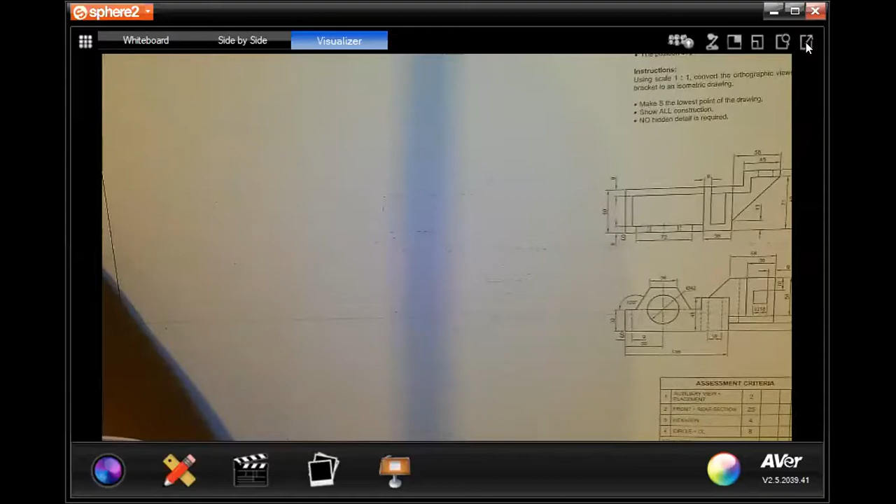So this is the task that we have today. Like I said, it's from March of 2017. It was a supplementary exam. So we want to answer it together and see how best we can negotiate our way to the required answer. The question reads, question number 3, isometric drawing. Given the front view and the top view of a bracket, so we have got the front view and the top view. Remember, in paper 2, we make use of third angle orthographic projection.

The position of point S on the drawing paper: point S is regarded as the lowest point in terms of an isometric drawing, or the closest point to you as an observer. Using a scale 1:1, convert the orthographic views of the bracket to an isometric drawing. So we need to convert these 2-dimensional views to a 3D pictorial drawing. Make S the lowest point of the drawing, the point closest to you. Show all constructions, no hidden detail is required.

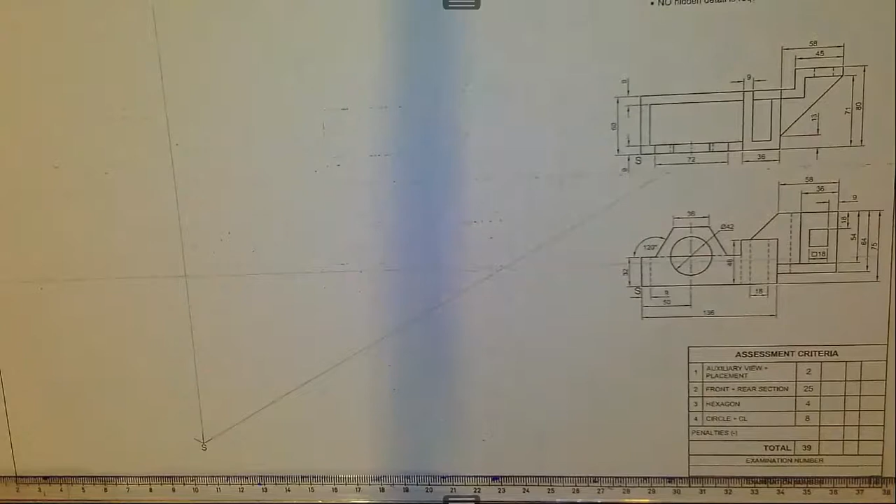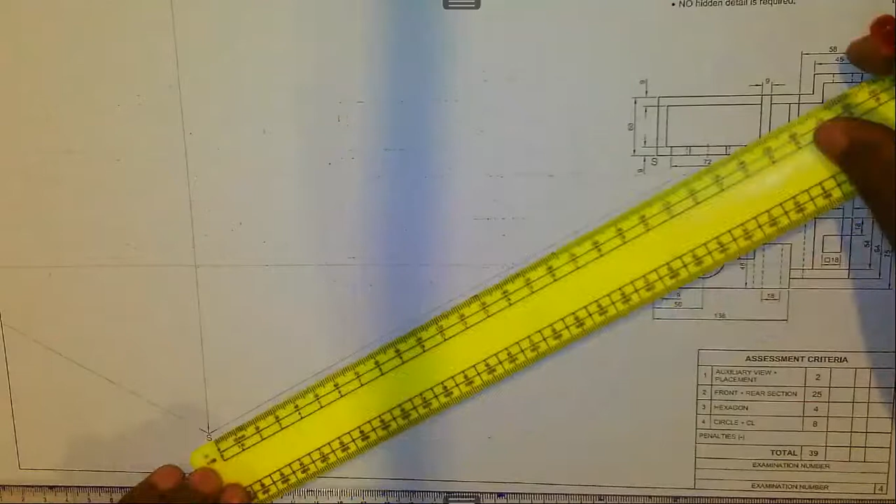The first thing is the establishment of the isometric box. Draw a faint line to the right, another faint line going up, then this one going to the left. We need those measurements. From this point to that point, that's 136, and from the other end at the top view, we have got 58. So 136 plus 58 gives 194. Remember, the isometric box is about defining the overall space that you will need. So we have got 194 there.

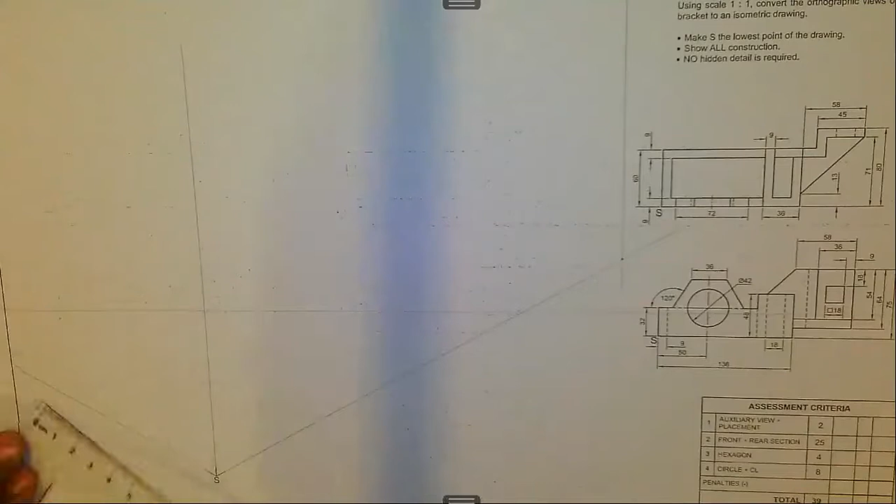We draw a faint vertical line from here, like that. Next, we need the overall width from the top view, which is 80 millimeters. So we measure 80 and take this one up faintly. The last thing we require for the isometric box is the height. The overall height from the bottom to the top is 75, so we measure 75 from here, and go to that slightly.

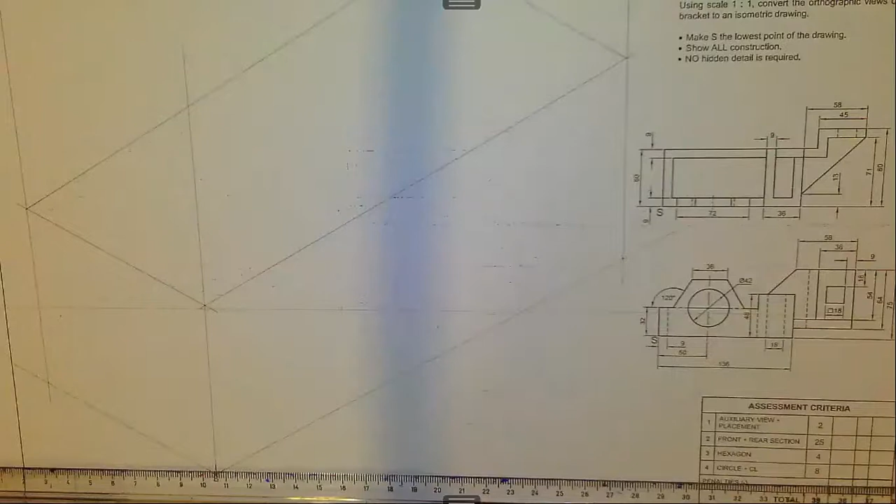Right, okay. So that's what we have in terms of our isometric box. We shall bring this one down slightly once we have defined that detail. Then the next thing that we want to look at, now you start with the definite, easy details that you can easily define. We have got the distance from here to there, which is 32, right? So we measure.

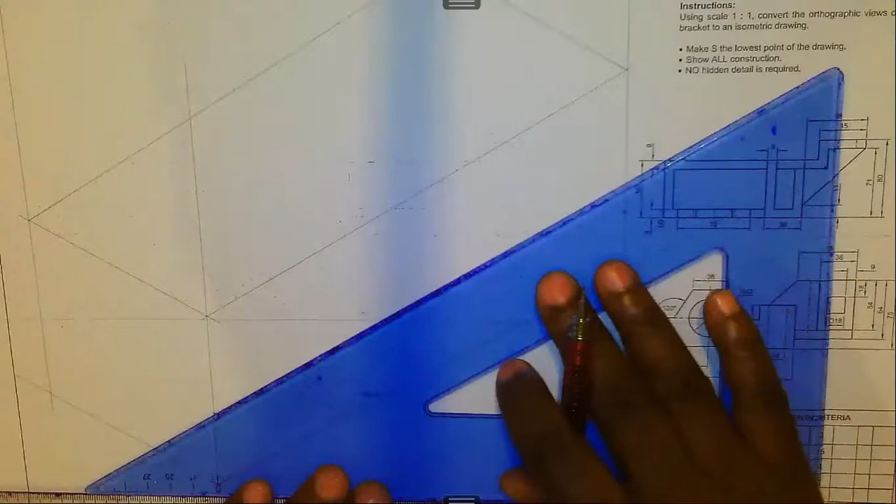Right, we have got that. Then we also take it to the left, like that. But once you have done that, the first part that we require is not going all the way 80 millimeters. We just need one which is 60 millimeters. So we are going to do this. Measure from here to there.

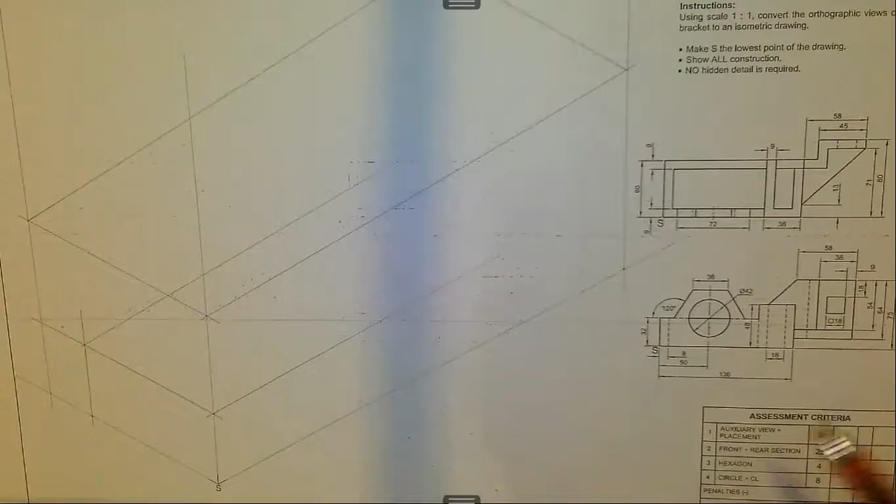Like that. Then we take this one like this, right? We are not going to draw all the way, because the detail may not go all the way as well. Right, okay. Now, the next thing that we want, there is this part, which is sort of a hexagonal part. We are not given the height from here to there, right?

So what we need to do is to create an auxiliary view. So we can come here like that. And we take this one up. Right, the side of that hexagon is 36. So we can measure 36. Right, like that. Take your compass.

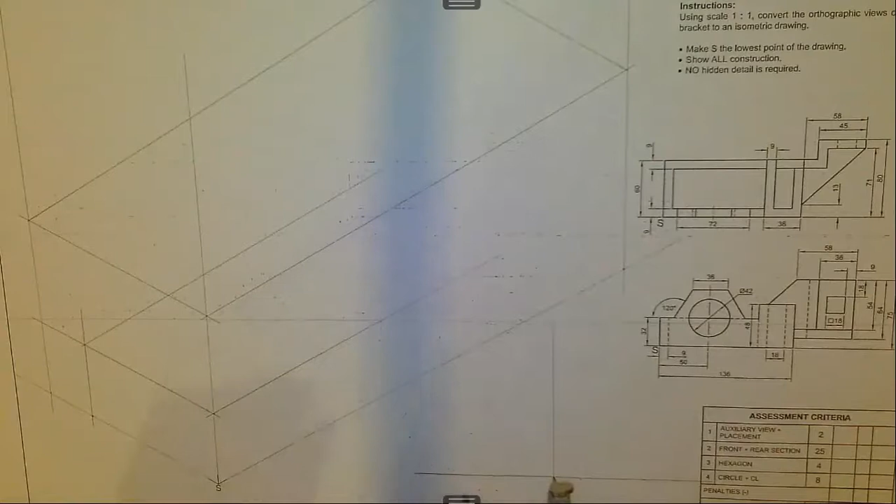Right, if you check with regards to the information that is provided, the distance from here to there, which is the same as from here to there, is equal to 72. So 36 times 2 would give you 72. Then you mark this side, and you also mark that side. Remember, you can do this using a set square. Let me just illustrate that. Right, from here to there, you have got that. I would make this one slightly dark so that it will show our auxiliary view properly.

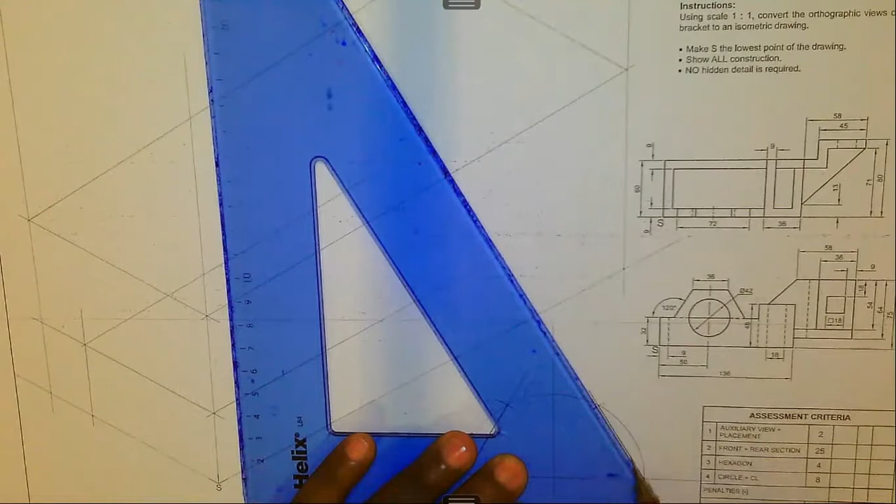Right. So we do have our auxiliary view. So this point is that point. So what we need to find is what is the distance from here to there. We realize it's 50 millimeters. So we can also come here and measure 50, and draw a faint line like that.

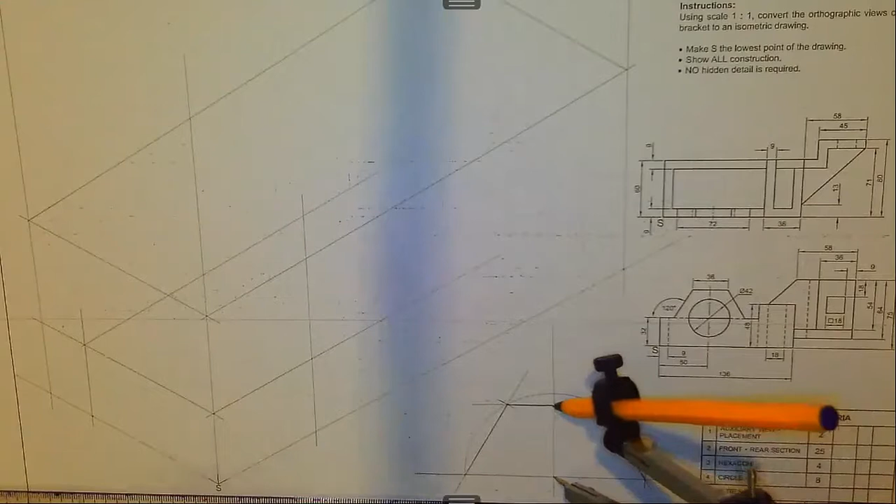Right, so we can take the measurement from here to there to establish the height. It's either we can measure or you can take that measurement using a compass. Take this measurement like this. Then we stand here and we describe an arc like that. And we draw a line like this. Once we've done that, we take the distance from here to there, which is the same as from here to there, and step or mark it off either side.

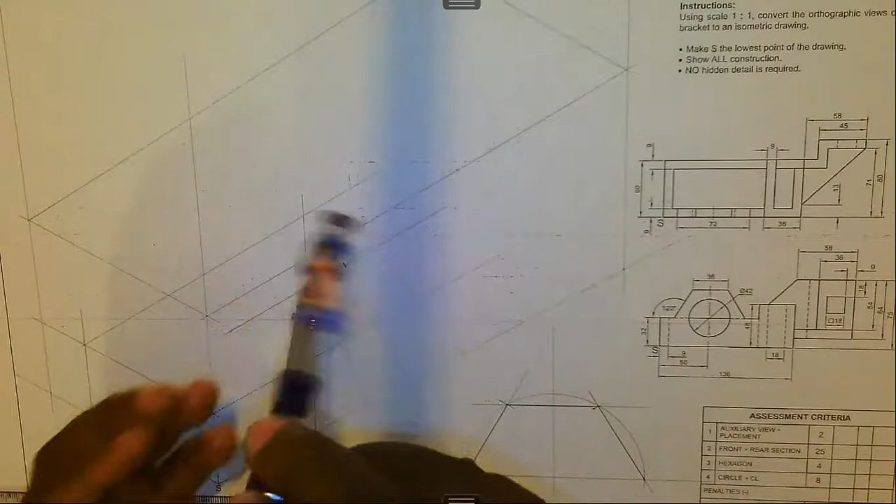Like that, okay? We know that the distance from here to there will remain 36, which is our radius. So we can either take it like this, and stand here and mark off this and that. We can now connect this to there and this to there. It's already there, and that one to there, so that we create our hexagonal part.

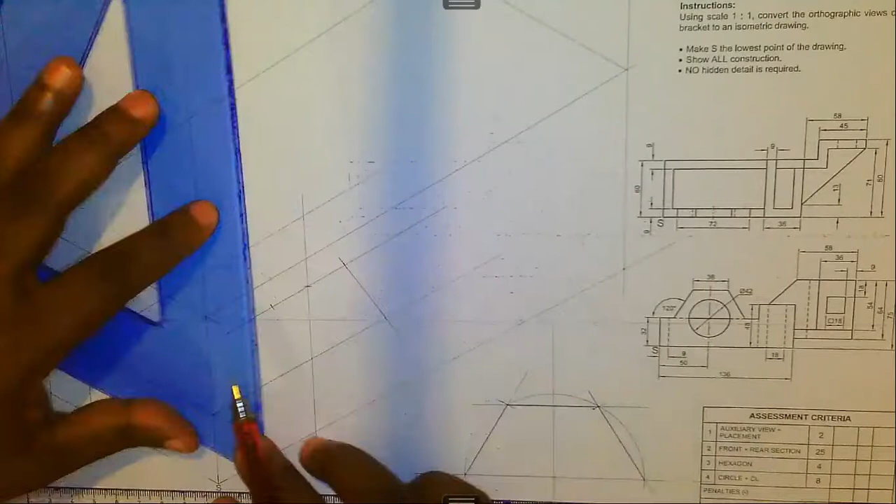Now, at this point, if you are confident, there is nothing that would stop you from outlining those details so that you are able to see going forward where you are going and where you are coming from. So we can outline this. So that's a detail that's not going to change. We can also outline this. Like that. And we can turn it around and do this. Outline this one as well.

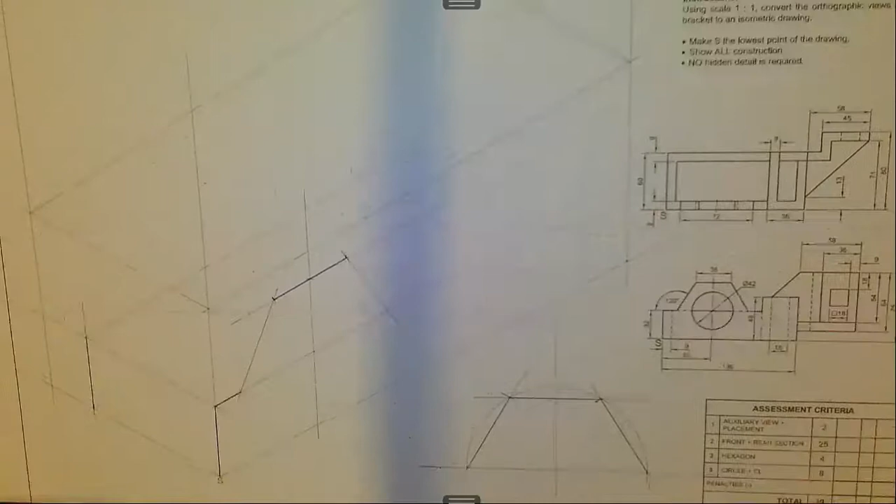Like that. Right. Any detail that would make it easier for you to understand and reduce confusion, that's what you should do. Then we can draw a line from this point. Sorry about that. We do the same.

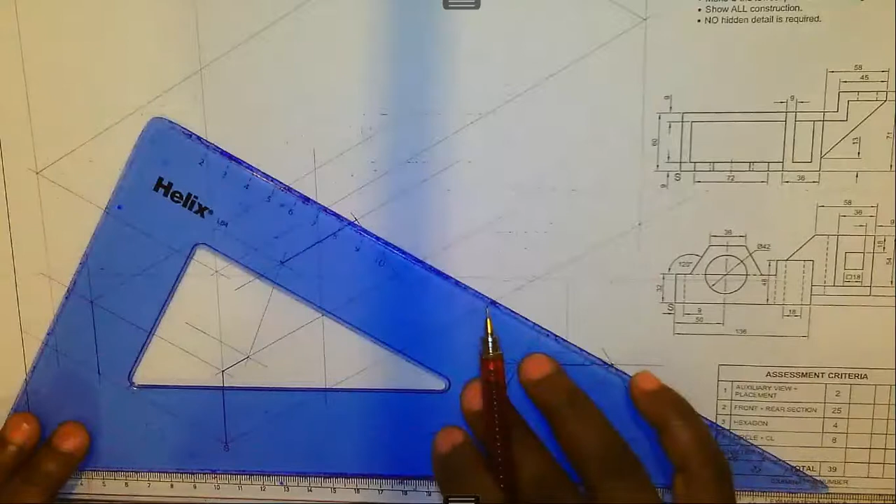Right. So we also need, if we check the thickness from here to there, that's 9 millimeters. So let's factor in that 9 millimeters. We can measure it here. Like that.

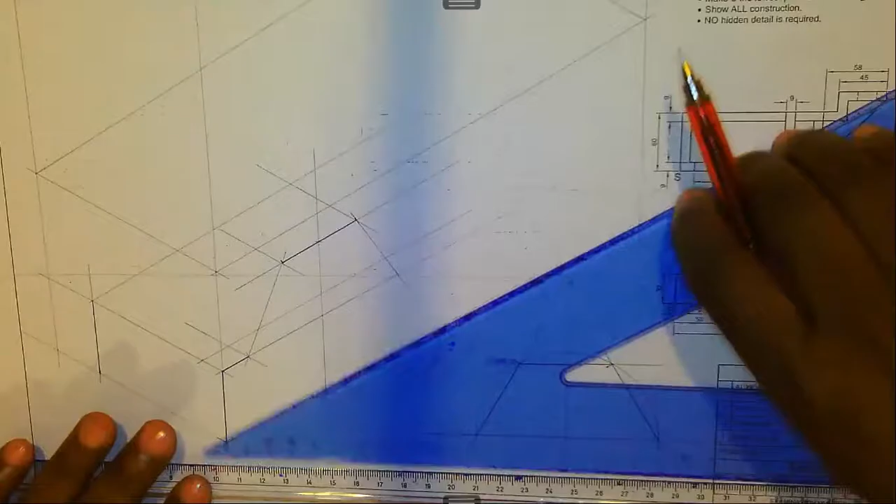We take this one all the way. We shall need that. Then we bring this one down like that. Then we take it to the other line, which is the 9 millimeter line. Like that. And we take it up. Then this way as well.

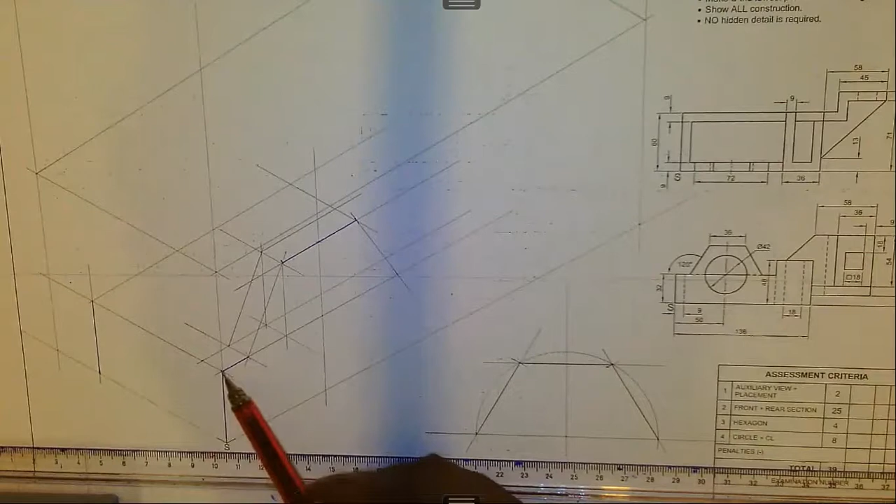So we can also now connect this point to that point. It's one and the same thing. Like that. Now, if you check, we measured from here to there, that's 9 millimeters, right? If you are doing isometric, the moment there's a vertical line or a line at 30 degrees, if I do this from this particular point, the distance from here to there is 9, and automatically this one also is equal to 9. So I can take it to the other side like that without measuring, okay?

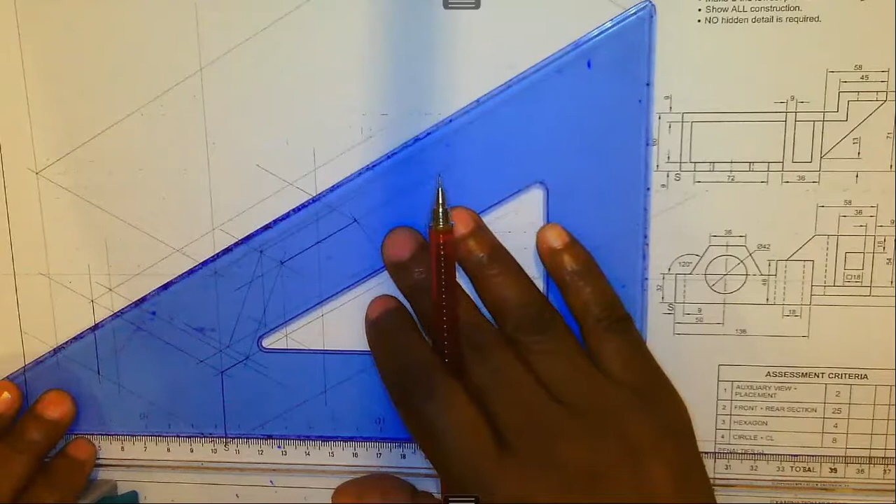Right. If I want also 9 millimeters, because this from here to there it's 9 millimeters. If I want 9 millimeters from here to there, I simply bring this one down like this. Right. So the distance from here to there would also be equal to 9 millimeters. Right. If I take this now to the other side, like that, we now also have got a distance of 9 millimeters from there.

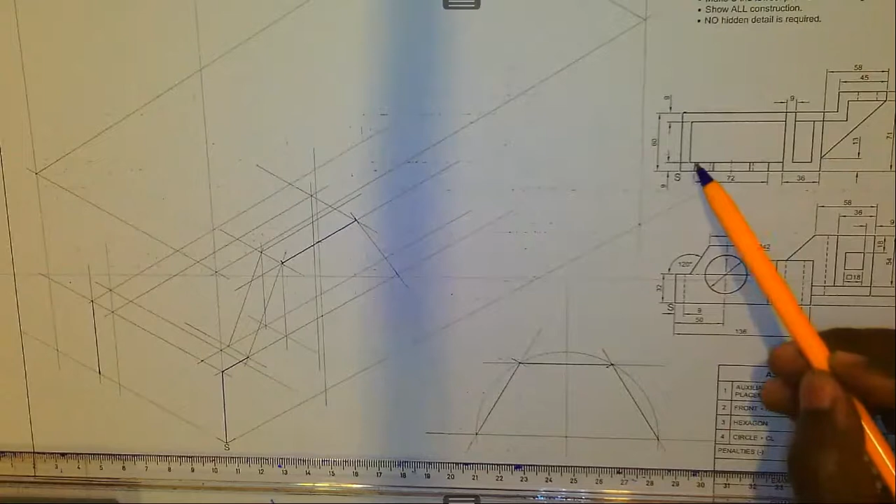Now, once we have done that, if we are looking at the information, the point that we have established is this one, which is also that one, which is basically in line with the upper part of that hexagonal part, right? So I can bring this one down, where it is visible, bring it down like that. Now, I've got quite a number of lines that I can outline. We can outline from here to there, from here to there, from here to there, and also that, and here, also there, okay? And this can also be outlined. So let's start with this one, which is the top part.

Right, but let's do this so that we have got a proper approach to what we are doing. Then we take this one from here. It's also 9 millimeters. We take it all the way to there. Then we have got this part. It has to be defined as well. But just start with the obvious lines that you are able to see. This one, that one. We also come here, this, the lower parts.

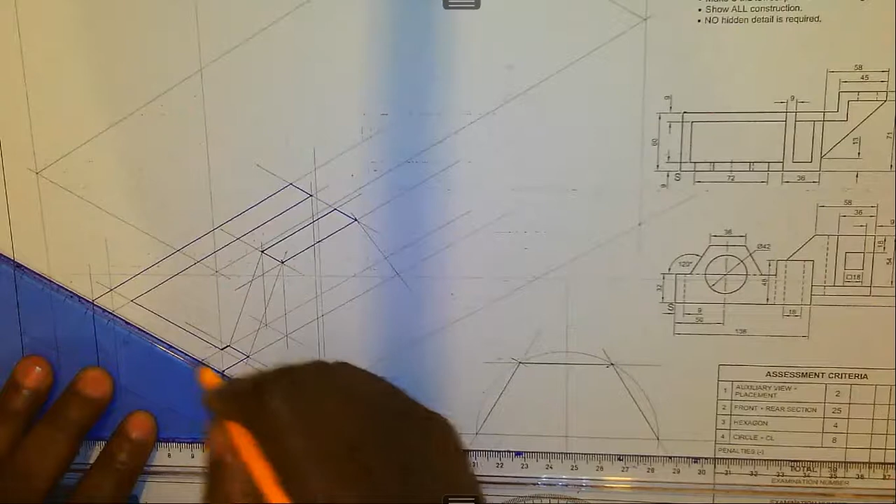Right, so we are now outlining. This is from here to there. When you get the concept right, isometric projection or drawing is very interesting and it's fun as well. All right, okay. So we can also bring this one. Now, this you can only do if you are certain that the information that you are defining is not going to be affected by the other forthcoming information. Where you are not sure, don't outline. Wait until you establish the whole piece of information.

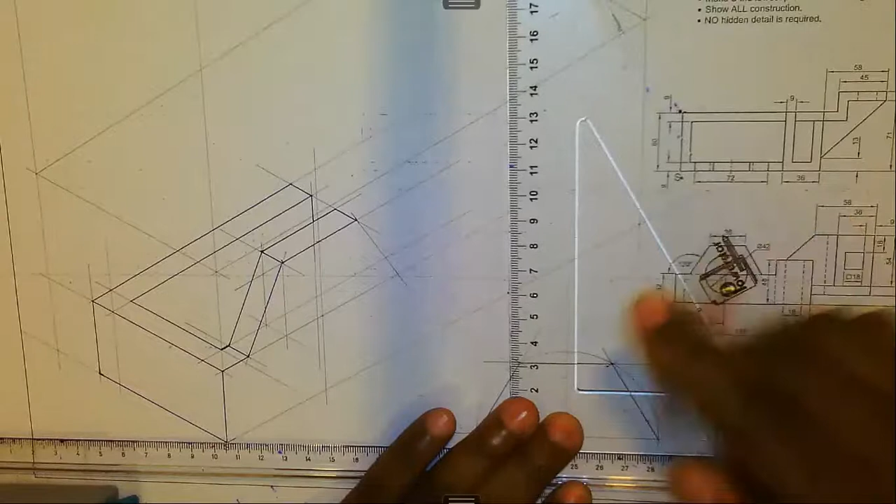There you go. Okay. Now we also see that if we measure from here going to the right, we have got 136. So from here to there, that's 136. Let's do that. It will give us something. Right, 136. So we get to that point. And we draw a line like that.

Right, from the 136, we have got information that we need to go backwards 36 millimeters. So let's see. Like that. Then we take this one up. We take that one up. Let's just see something here. Right, okay. In terms of the drawing, we would find that this would be about the same point as the line which is coming from there. Of course, we could have done that. It would have still given us the same point.

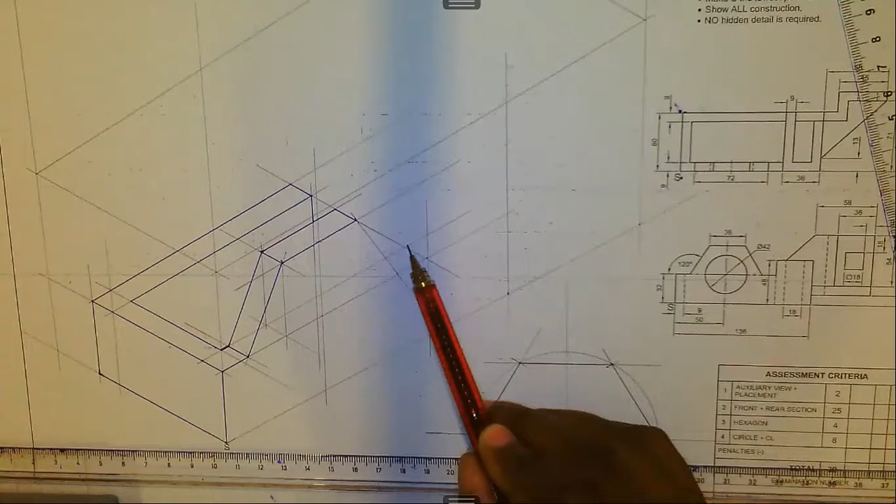Okay. Right. So now we have got the distance from here to there, and also the other part from the other end, which is from here to there. Remember, at this point, if I were to project from here, like that, this point is connected to that part, but we don't need hidden details. I'm just going to illustrate faintly like that. So this point is the same as that point. This point is that one. So the distance from here to there is the same as that one.

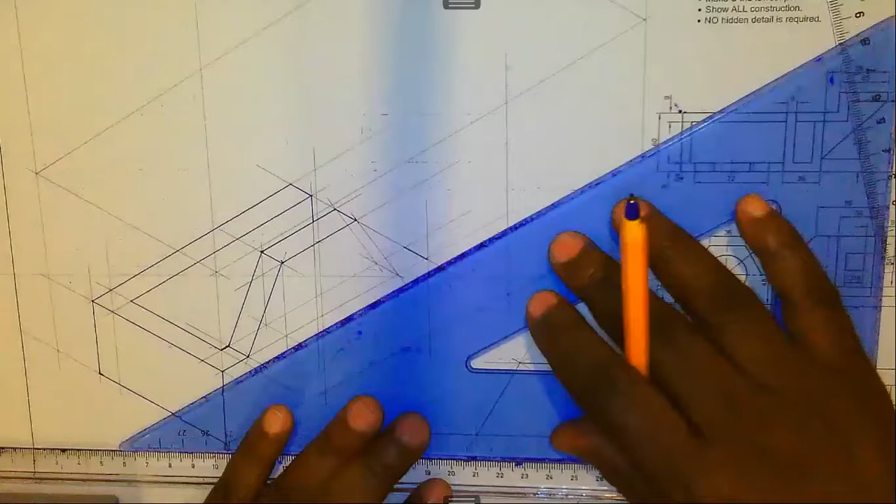So what it means at this point, we can outline this like that, because this one is going up like that. So we can also do the same. So I take this one and project to there, but then bring this one down like this. There you go.

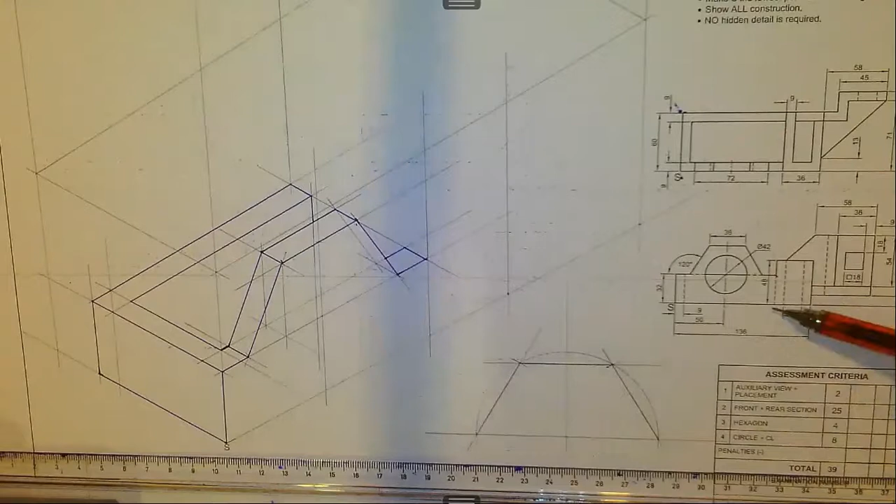So the next thing that we want to do is to continue with this, because that's where the end part is, to extend this one and also extend that one up. You can see this point and that point are raised up. So we are going to extend this one up, and this one too. Like that. Right. So from here to there, we have got a measurement which is given from the base, which is 48, right? 48. So let's measure from here to there, which is 48.

Then we take this one up. The moment you do that, you take it to the other end, now to the 36mm mark, and you take it back like this. From this point, you can extend this one like that. So you now have got the raised part, right?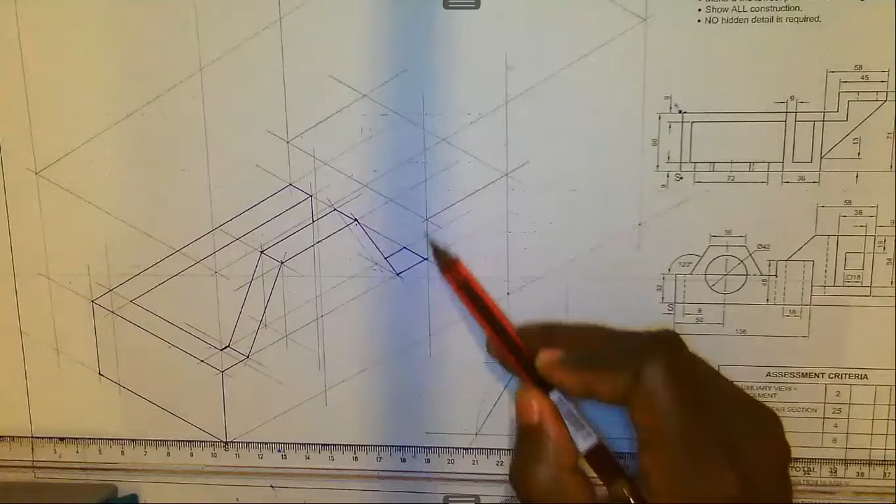But as you can see, this would run all the way from here to there, which means it's from here to there. Then we raise this, we raise that. Those are definite details that we can define. So we are not going to wait until everything, because you are going to create a lot of lines and they may end up confusing you, okay? But this line, which is that line from here to there, which is that corner here. So we can take this one.

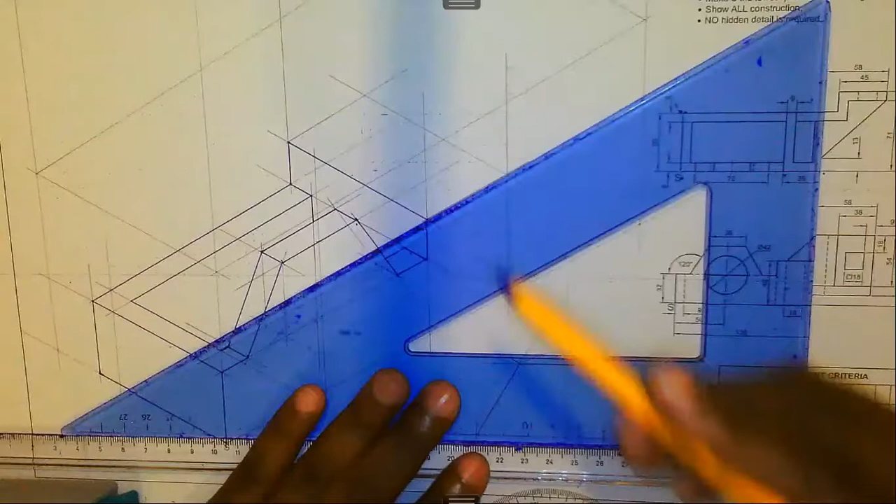Right, so there's nothing that would stop us from outlining this, which is to the other end. So we take this one all the way to here. And we take this one down, which is this edge from here to there. Like that. Now, if you check closely, you'll find that there is a line from here to there. It's not disturbed at all, right? So let's define that line as well.

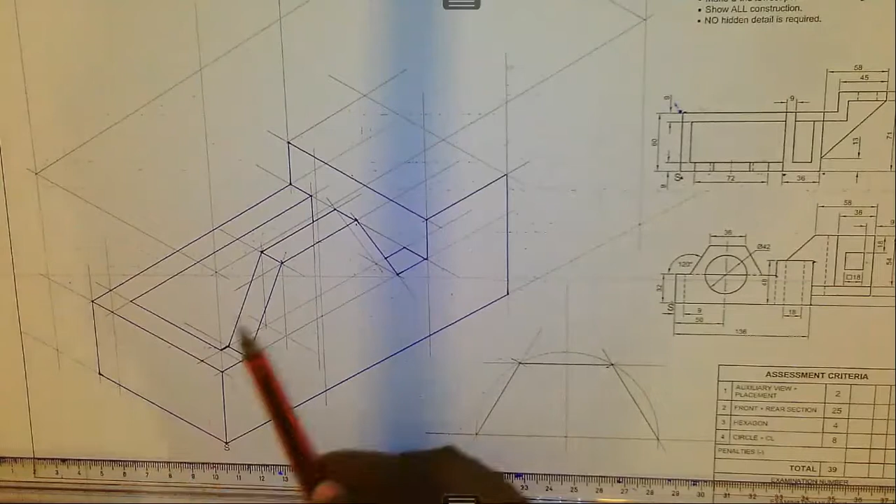Now, there's something that I want us to look back and check. We have got this line which would come here. So we would need to take this line backwards, right? If we are able to see it here, that would be the lower part of that 9mm thickness. So we'll take it from here. Like that. Now, we are able to see it partly here, right? So we'll outline this. Like that.

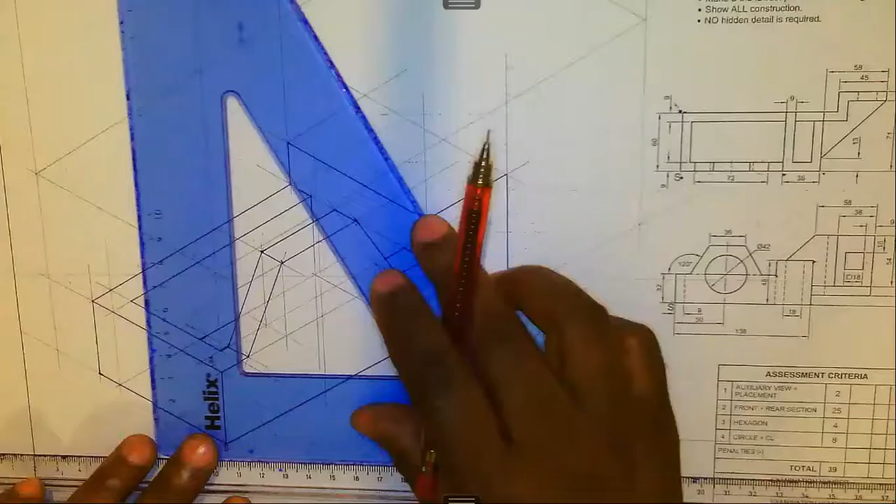Now, this lower part, it comes here, but for now, we are not going to outline anything. Then we take it like this. But maybe at some point, we might be able to see it. Now, remember, you'd find that the thickness would be here, which would be one and the same thing. So if we were to show hidden details, that would be the point that we require, like that. And this would have been the point that you would also require, right?

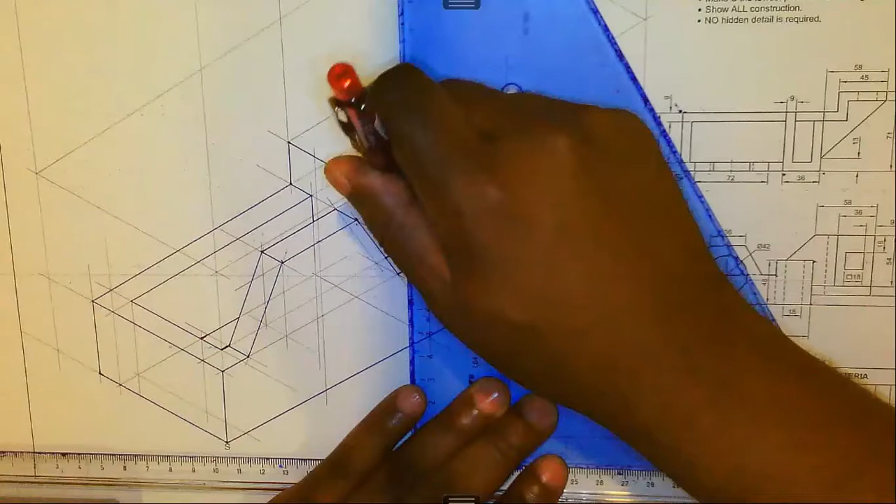Then you go to the other side, okay? We would turn it like this. So later on, we might need to define that part if it is feasible, but we would wait and see. Now that we have got this, as you can see, the 9mm would still continue, okay? So we can take this, take it up, like that, which is parallel to this, then project it to the other end, like that.

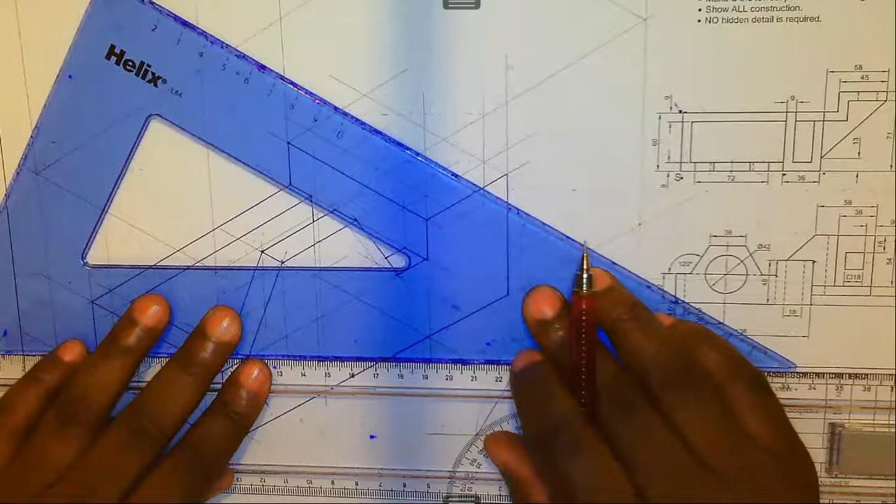Now, the moment this line meets the vertical line here, you would have created a thickness, then you take it to the other end, like that. So from here to there is the same as from here to that point. And if we want another thickness on this line, what we do is simply bring this one down. This is meant to increase your speed, but at the same time, it is meant to make sure that you avoid unnecessary measuring. Just shape. Like that.

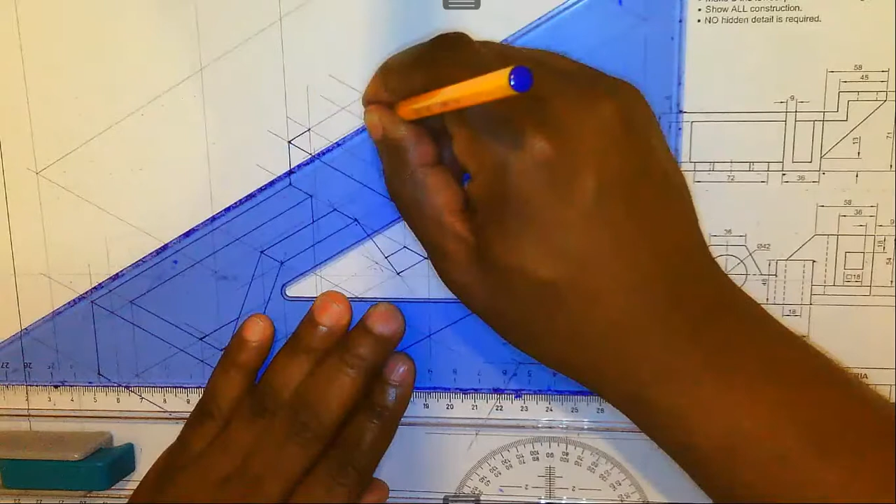If I want another thickness here, I would do this. Like that. Then take this one to the other side, okay? Now, at this point, I can outline this, it's already outlined, but from here to there, then I can outline from here to there, which is the same as from here to there. Then define that, then outline from here to there. All that detail can be defined easily. So we'll start with this one. Right, we stop there. There you go.

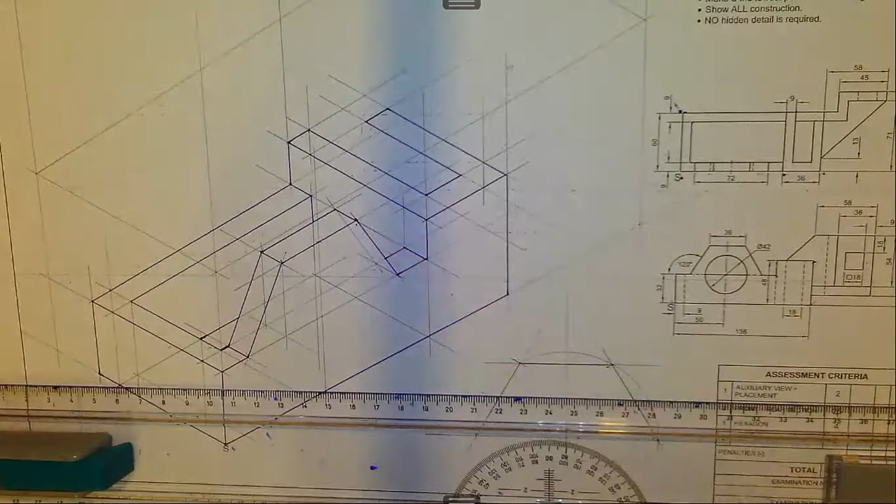Right, okay. So once we have done this, if we check with regards to our diagram, at this point, which is this one and that one, it has to go up to the highest point, right? So if that is the case, we can raise it and it goes up to the end, which is the same as this one. So in line with this one, we need to take that one to the isometric box line. We take that one. It's like this, okay?

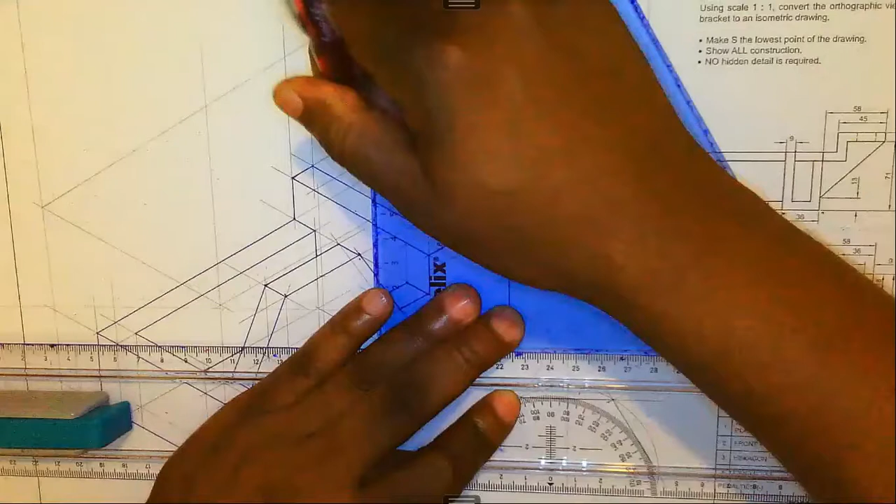Then we take this one up. Let's start with this. Like that. Then this also needs to be taken like this. Like this.

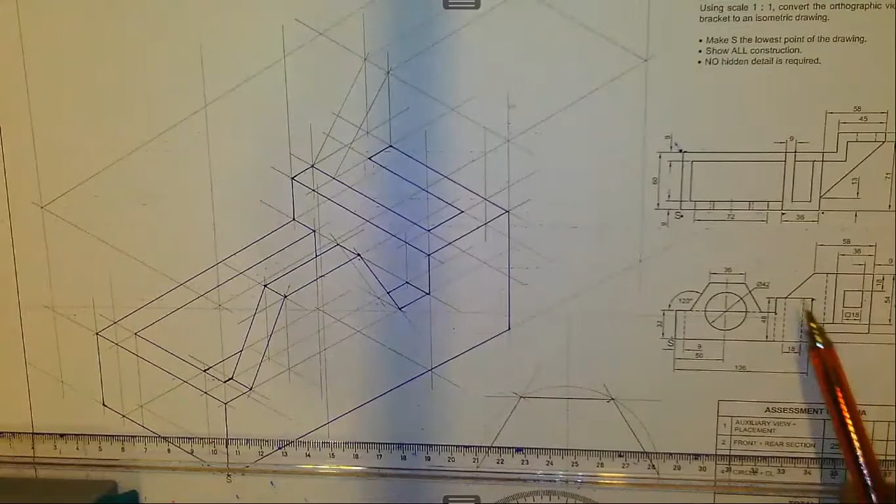So at this point, we can connect from here to there and connect from here to there, right? In order to create this slant, which is from here to there, which is the same as that one. So we would come here and do this. As you can see, we are not measuring quite a lot, but we rely on the original measurements that we did. Okay. Right. So this part, remember what you need to do: when you are looking from this side, the information that is given here should be reproduced by looking from that particular direction. Right. So from here to there, which is from here to there.

But I think we need another line here, right, which we discussed in our last lesson, to say at each and every point, make sure there is a line which goes to the left, to the right, and either up or down like that. Right. At any point, there should be 3 lines. So we can outline this. There you go.

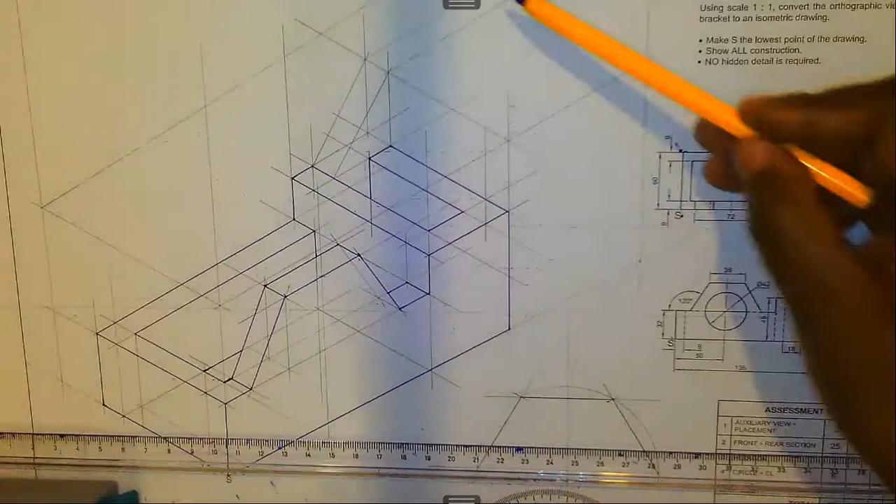Right, we have taken this one up, projected it like that. Then if we check, we have got the distance. Let us just verify if this is correct. From here to there, that's 58. Which is perfect. Okay. So the distance from here to there, that's 58. So we are correct. All right. Then we have got a measurement from here to there, which is 45. We need to measure 45 from here.

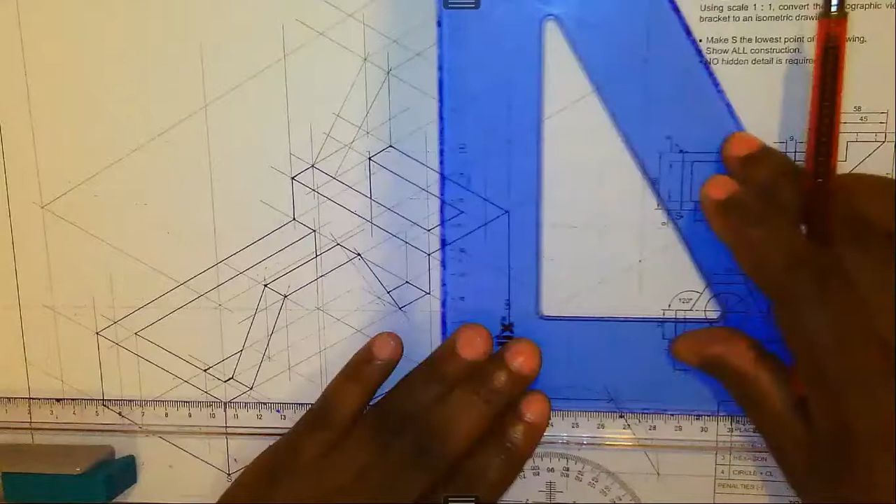Right. The 45 will now take us in this direction. So we turn all the way to the end of the 80 millimeter mark, which is from here to there. Remember, we also require a thickness of 9 millimeters. You do this. You project like that. We also require a thickness of 9 millimeters, a vertical line, like this. Then we take this one.

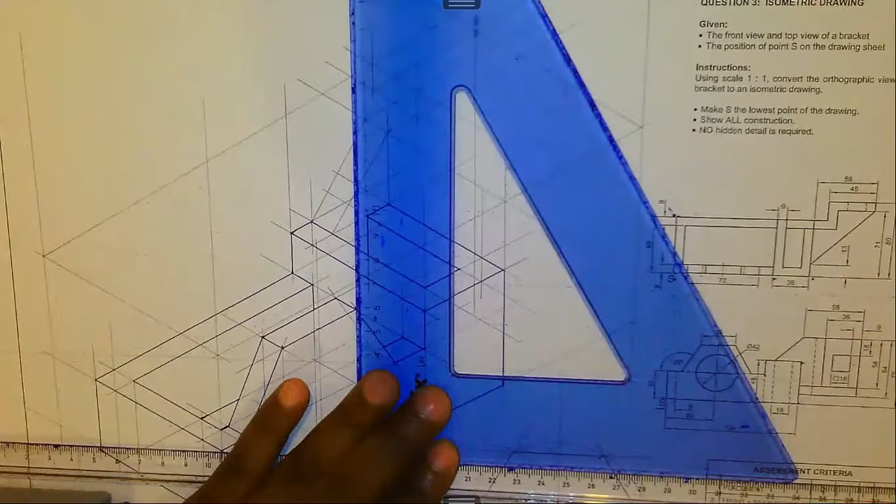Now, this is the inner position, so we can take this one down. Take this one down like that. Maybe we shall need that one later on. But for now, let us outline all the details that we have defined. Right here, at this corner, you need this. Like that. So we can outline from here to there, and from here to there, from here to there. Remember, you need to have a system in terms of how you define your diagram. If you are dealing with the lines going to the right, you continue with that until you are done with everything.

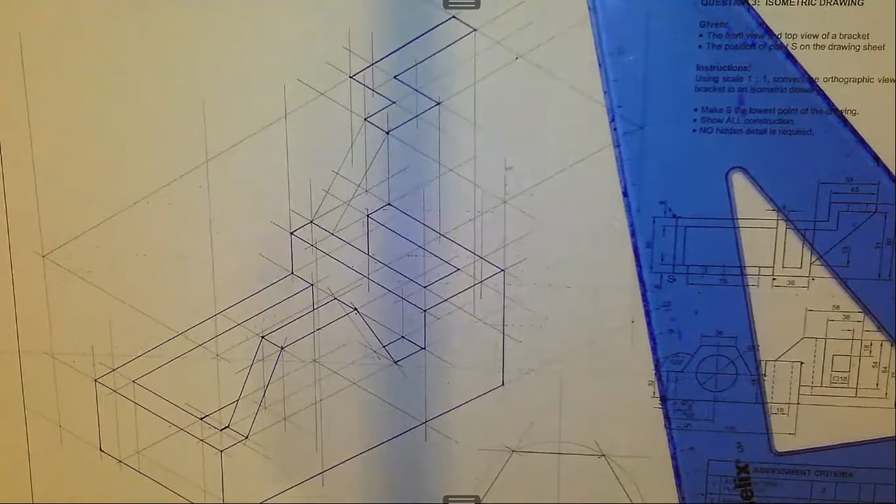This. Then I can turn. Right, our diagram is slowly taking shape. Then we connected this point to that point. As you can see, this is a flat surface, where we only have got a corner at this point, which we need to define. So let's project from here, just align. Like that. But we have got that particular corner, right? So we can also now outline this, which is the slant part. There you go.

Right, I don't think there's anything that would stop us from seeing this, because that height from here to there, that's 54. Let's see if we've got more than 54 or less than 54. Right, so the 54 would come somewhere here. So this would be defined without any challenges. Like that. And this one too.

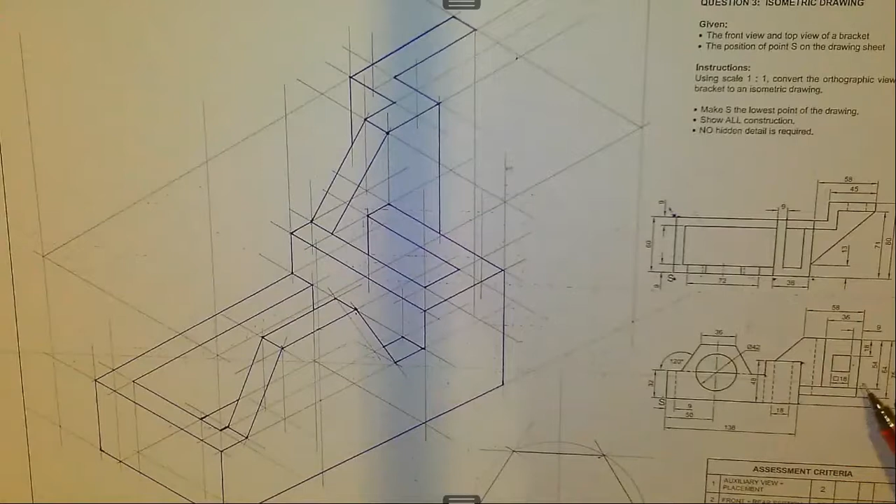So what we require now, if we check with regards to the information that is provided here, we have got the overall height from here to there; that overall height is 75. Then the height of this one going downwards is 64. So we are going to say 75 minus 64 will get 11. So we are going to do this. We measure 11 millimeters here.

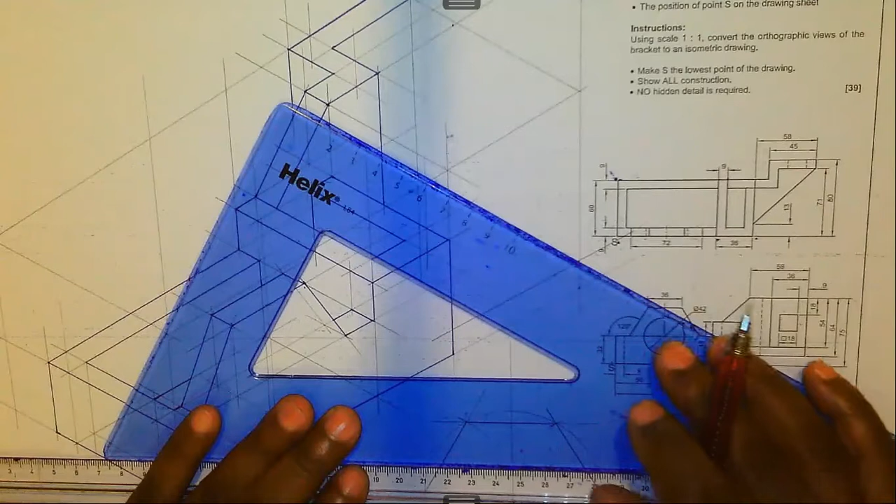But on the isometric box line, then we take it here for reference purposes. Then we take it to the other side. Like that. So this should give us a height of 64. But let's measure and see, which is roughly 64, off by half a millimeter.

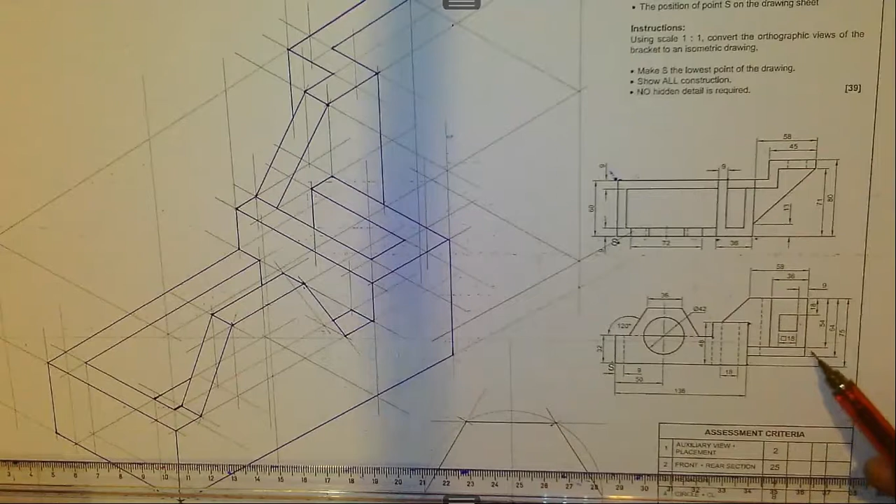Then the 64 is here, but there's also another thickness, which is from the top, which would still be equal to 9 millimeters. Let's see, it's equal to 10 millimeters. So we can also measure from here to there, 10 millimeters, 64 minus 54, like this. Let's see if it is visible.

That would give us from here to there, that's 54, which is that point, okay? So that's where you would find that we can now project. There should be a line in that direction, but representing that upper part, right?

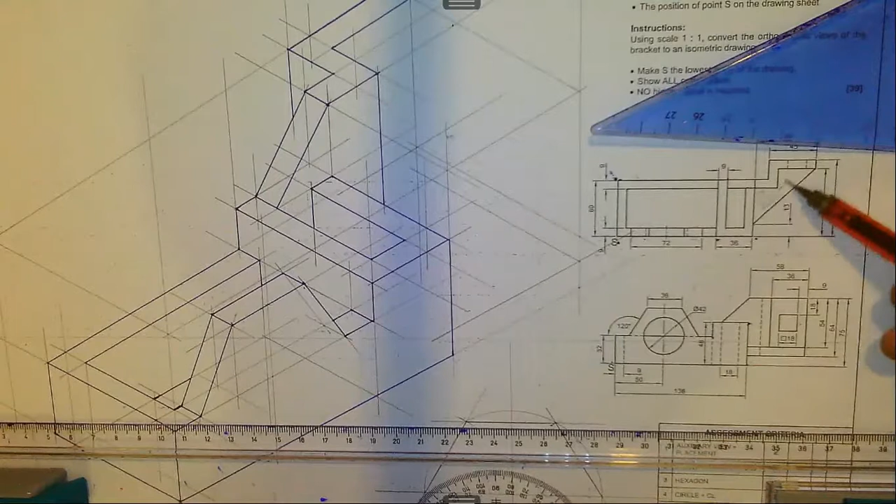Then if we come here, with regards to the top, we can see that there's a 13 millimeter to this kind of platform. Remember, that is also a platform which is 10 millimeters thick, right? So we need to measure on this. So let's extend this line like that, okay? Then we measure from here to there, 13 millimeters. 1, 3.

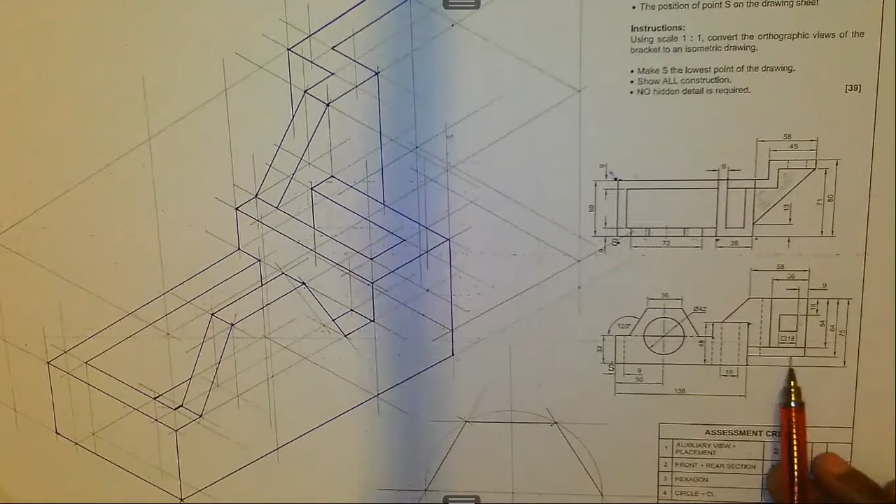If we do that, we can now connect with this point, okay? Connect with this point to that 13 millimeter. Not that one, which is here, okay? Remember, it's at this level. It's not right at the bottom, right? It's raised. If we check with regards to this one, it's not right at the bottom. It's raised from here to there, which is 11 millimeters, which we take from here. But then we measured from here to there, that is

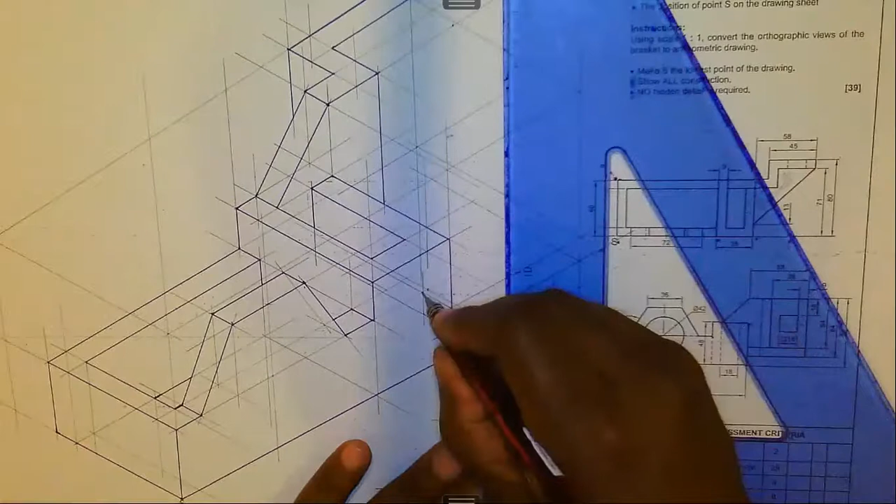we also need to project this one, remember? Take this one 10 millimeter and we also project like that. Let's see what would happen. Take this one like that. Then take it to the other end. Raise it from here. We get a point like this. Then we connect. This point is connected to that point.

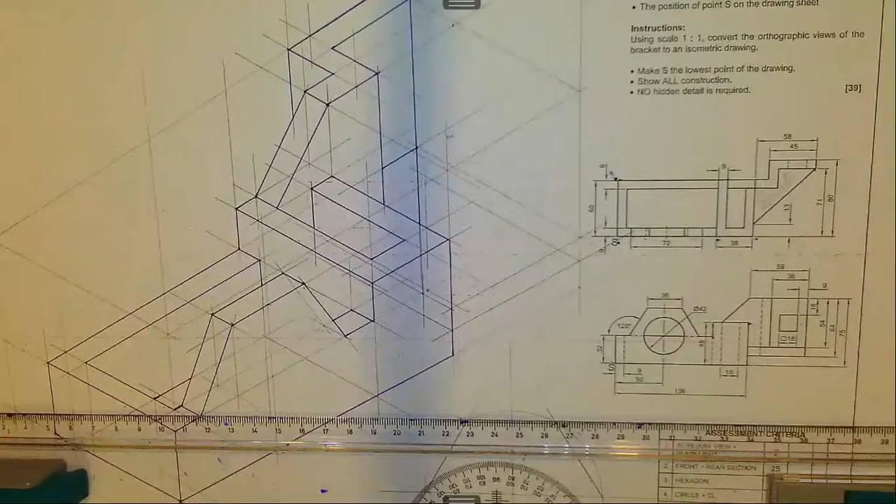It looks like it will just be one and the same line that we have, okay? So we are going to outline from here to there to represent this line which is from here to there. So let's do that. Like that. Then this is drawn this way. And this comes all the way from the top, which I said would appear to be just one line from the top like that. As you can see, our diagram is taking shape in terms of the orthographic views which are given here.

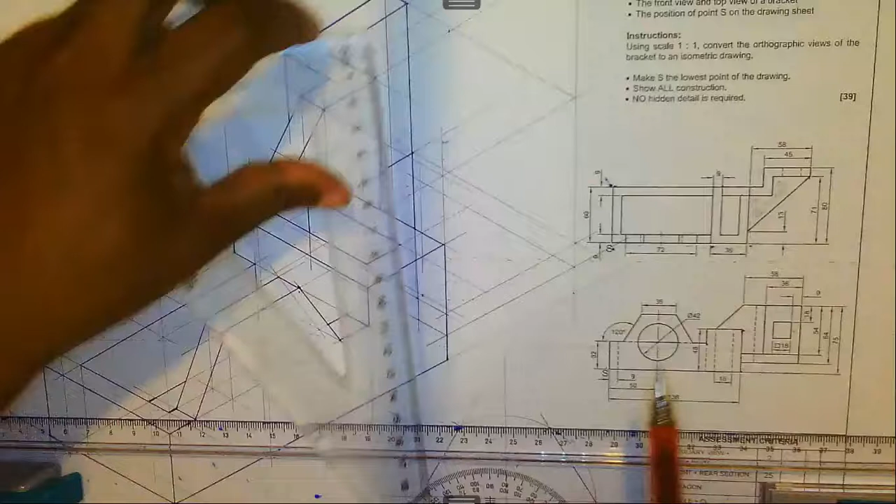The last thing that we want to look at, there is also an opening here. There is also an opening, right? We know that the distance from here to there would remain 9 millimeters. So what we can do, we bring this one down. Like that. So the distance from here to there is automatically 9 millimeters. Then from the top, we have got 18 millimeters. Let's see, slightly above.

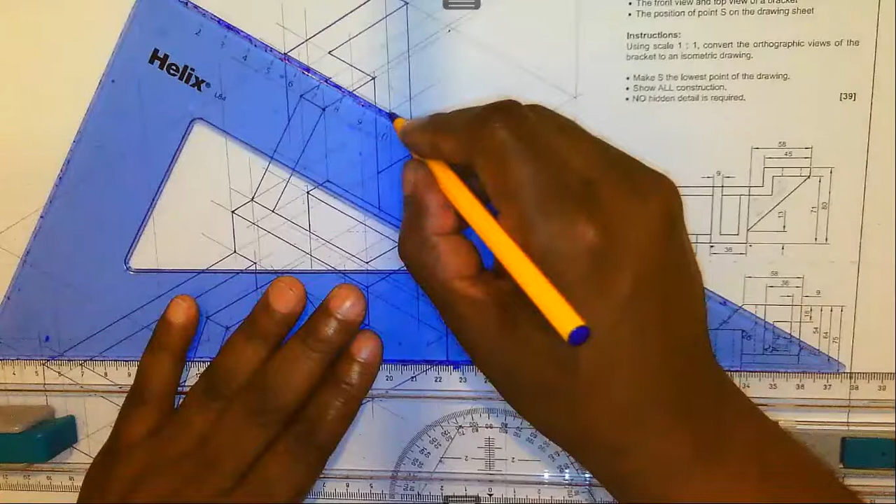Like this. Then we also need 18 millimeters because they said it's a square side 18 by 18. So we need to take from here, measure 18. Draw a line like that. Then we also draw another one like this. Okay. It's less than 9 millimeters, so we are going to outline this all the way. And we define this one like that.

So that is the opening through, right? That is the opening that we are able to see, which will be there on this platform only. Now, I think we have drawn everything that we require except the circular part. Let's check the specifications. It's diameter 42, which means we need to create an isometric square. We measure 21 up and 21 down to make it 42.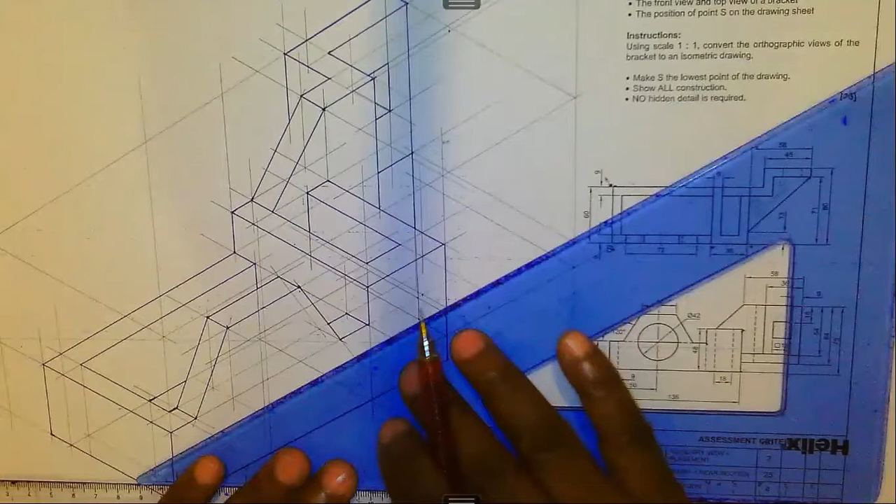Like this. Like this. But if you don't want to waste time, draw through the center. You can easily get the other sides. So the distance from here to there is 21. The distance from here to there is also 21. Then we do this like that. We also come here and do the same thing like that. Now we have got our isometric square.

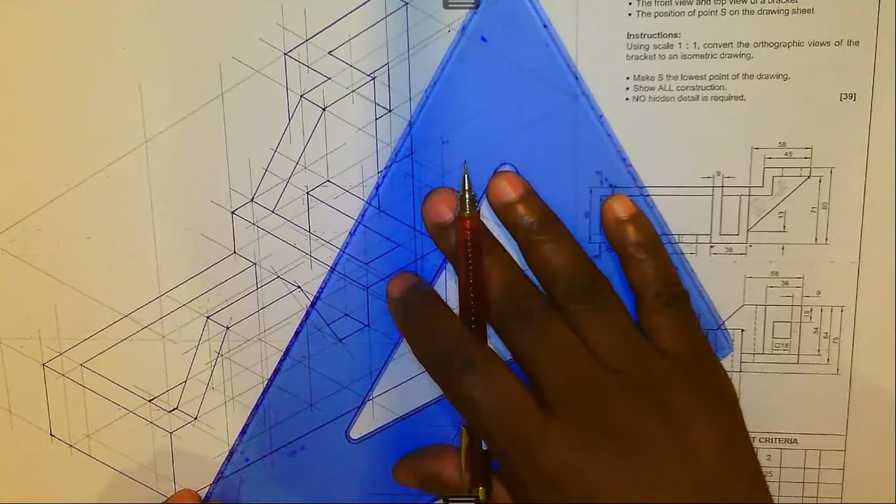But then from there we can create a diagonal. Create a diagonal like that. We have got a center there, right? So we can now connect, define that, cut the diagonal, we have got that, which is the point that we want. We do the same thing here. This is circle construction, right? So with this center and that center, you connect from here, you draw an arc, you stand here, you connect, you draw an arc like that. So that's our first one.

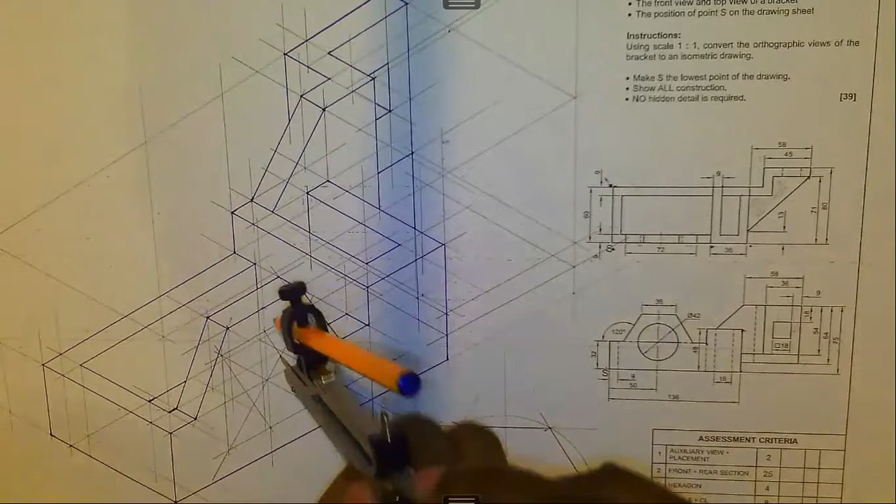Sometimes it's worthwhile just to test. So we can put it this. Outline that. Then you go to the other side, stand at the established center, check, and also check this side.

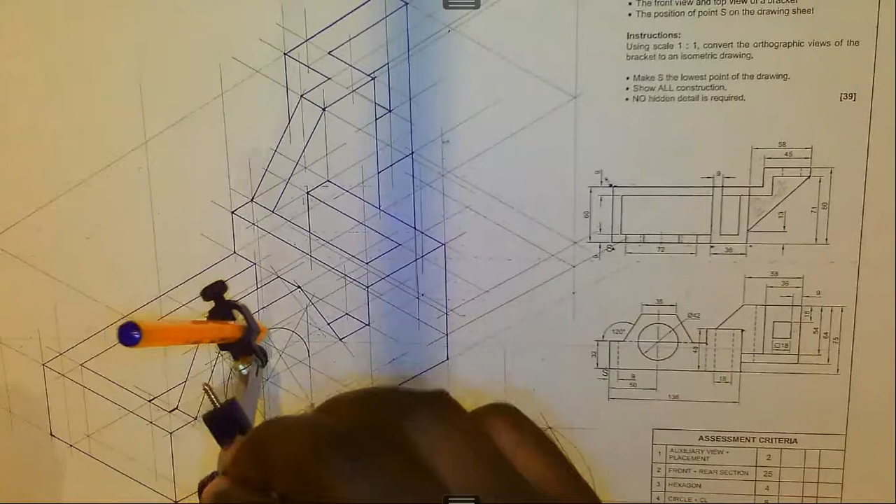Then we do this. In a perfect world, you would not need to adjust anything, but remember, there is an element of human error which is involved, and this one is perfect. Like that. We stand on the other end. Just need to adjust a little bit. There you go. Right, so we have got our outside circle. That's our outside circle, the first part of our construction.

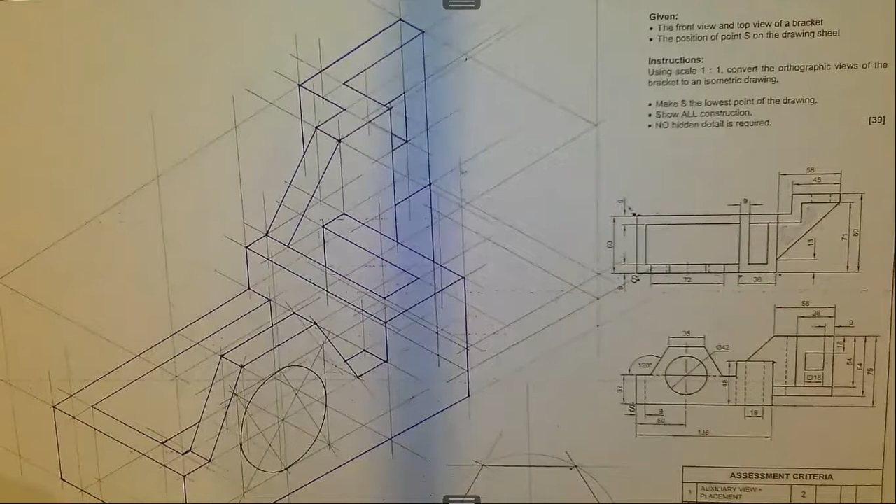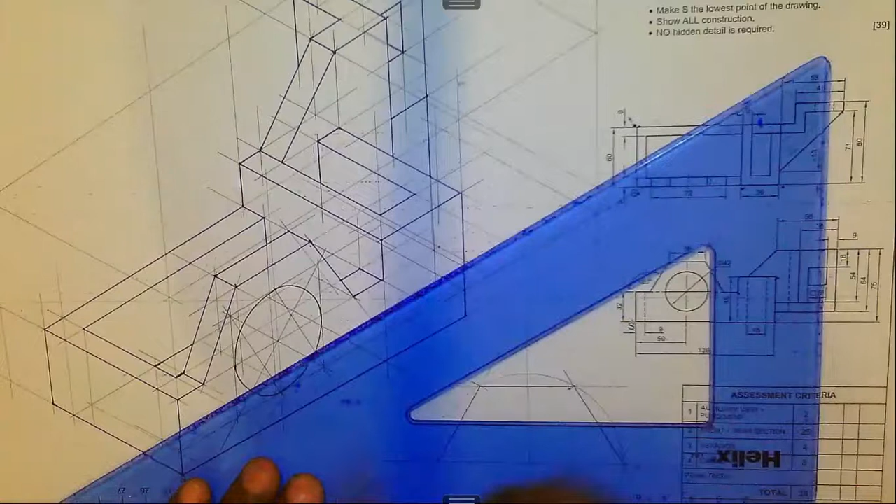Then what we need to do now is extend this line to hit the isometric box line, like this. Extend this. Right, I'm extending this to hit this isometric box line, like that. Then you take it to the other end, to the next thickness, which is here. Then you take it backwards. This would limit the need for continuously wanting to measure, okay? You transfer this one now to here, like that.

So a corner like this one is here, okay? Right. Then we can also project from here and also project from there, like that. The other corner, which is like this one, is already defined, which is there. We take this one up. We also take this one up. Like this. So we have created our second isometric square. But on that one, we also create a diagonal like this. It's very important.

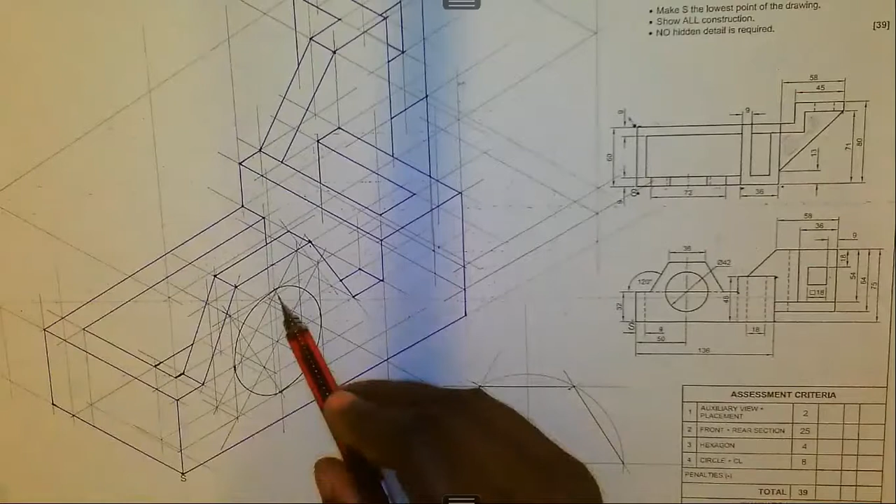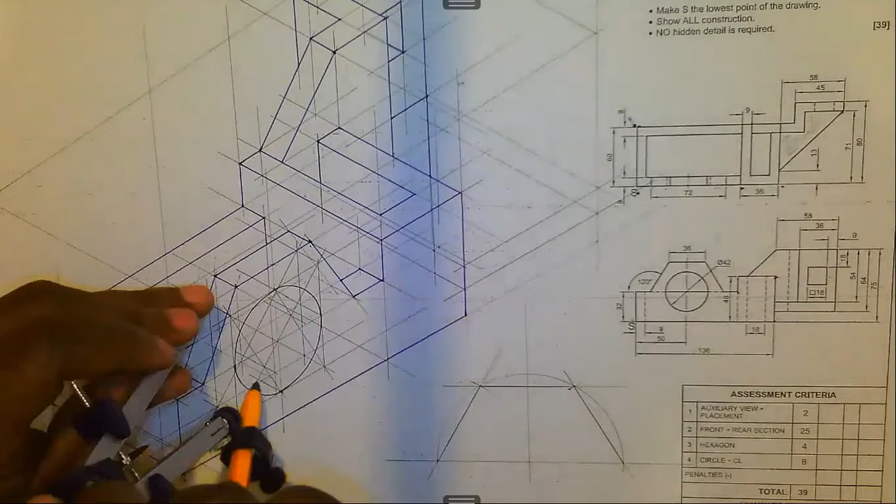We transfer the center from here to that diagonal, the center from here to that diagonal, so that we don't need to do the same process, which is repetition. So we are going to simply transfer it like that. But this center, you also require it on that other side, just for reference purposes. The same applies with this one for reference purposes. Okay, we will go to that. Then the same applies with this one. Like that. So if I were to stand here, open to that point and that point, which is perfect.

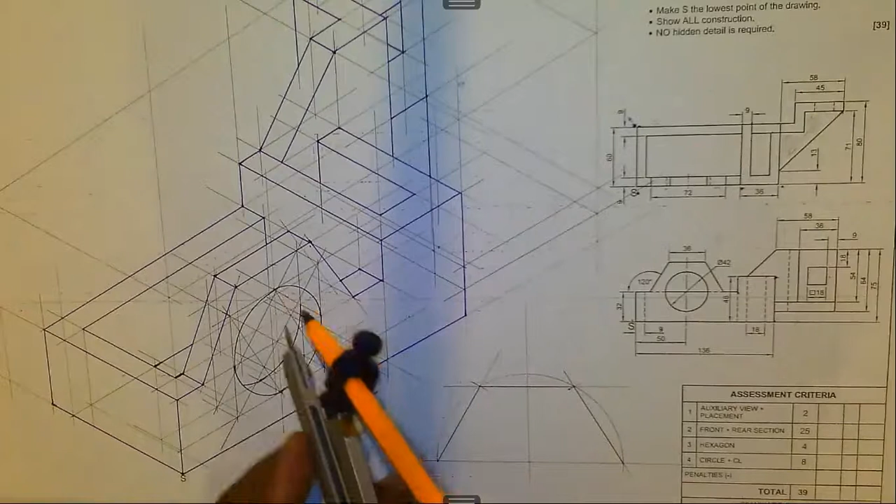When I describe that, as you can see, don't be tempted to simply draw an arc all the way. You'd find that you may need to use the second diagonal in order to draw the other part. So I'm going to stand here on the second diagonal and open to where I stopped, like here, and describe an arc. It will be stopped by the outside circular part. Like that. So if the examiners are marking your work and they see this, they will know that you know exactly what you are doing. There you go.

You would have constructed the circular parts. But the next thing that you would require is simply to define the center lines. I'm going to use a red pen and also show it this way, like that. So now your circular part is done. Remember, at some point we did draw a line and brought it there, such that there was a point here. What it means basically is that we should be able to see it partly. I'm going to use a red pen here to describe that part.

It's coming from down there. Then we see it partly here. Then the one which is going to the right like that. Then we would also be able to see it partly like this. Again, you'd get a mark for that small little line and that one as well, together with the information about the circular parts.

Right, so I'm sure we are done with our exercise for today. We have defined everything that we wanted. I'm just going to graphically show something here. Remember, you don't get marks for that. So that is the lower part of the inner part of the slotted square opening, which is here. I'm just illustrating that part. So this is it in terms of our isometric drawing for today. I hope you were able to follow all the steps we have been making with regards to the construction of this task, and hopefully you enjoyed what we did today.

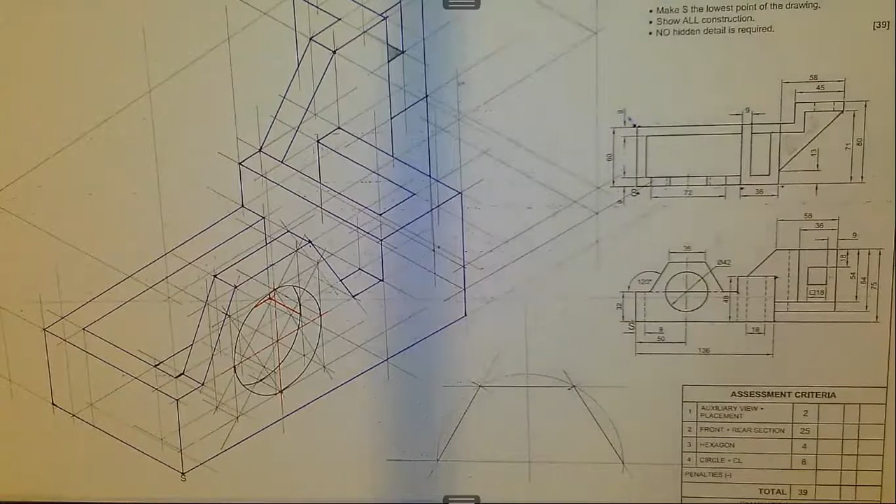It's important. Remember, if you don't treat practical subjects, technical subjects like hobbies, you will not be able to master the art. So make sure you enjoy what you are doing, especially with drawing, so that you are able to express yourself. We'll see you again tomorrow when we look at another task. It might not be isometric. We will be touching on past exam papers. In terms of our revision, let's limit it to about 5 years going backwards. Do not go beyond 5 years because we need to look at the trends in examination techniques and ways of asking questions.